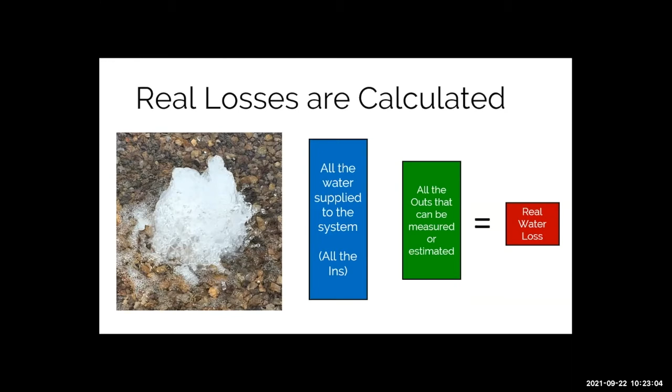Real losses are calculated when using the audit based on all those other volumes that you enter. Since the real losses are calculated, they can't be broken down based on the water balance or the water audit. This is important for you to understand. The real loss value is calculated based on your inputs, so there's no way for the audit software to give you any additional information about that value. So just keep that in mind, that it is a calculated value based on your inputs.

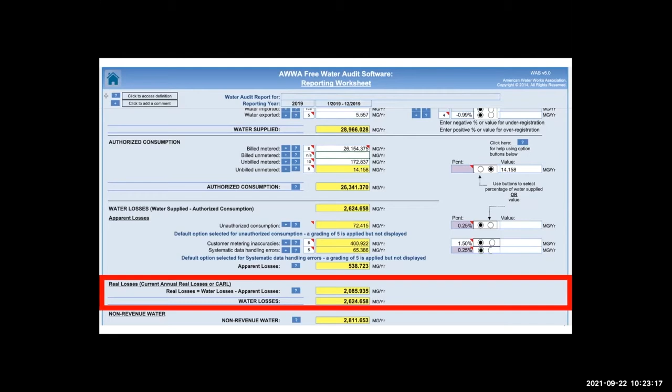And when you're in the audit software, the real losses are calculated at the bottom of the reporting worksheet. So that's where you find them in the audit itself.

So what that's showing us is that real losses are a big concern for some systems - a large majority of their losses are real. And for other systems, a very small portion of their losses are real losses.

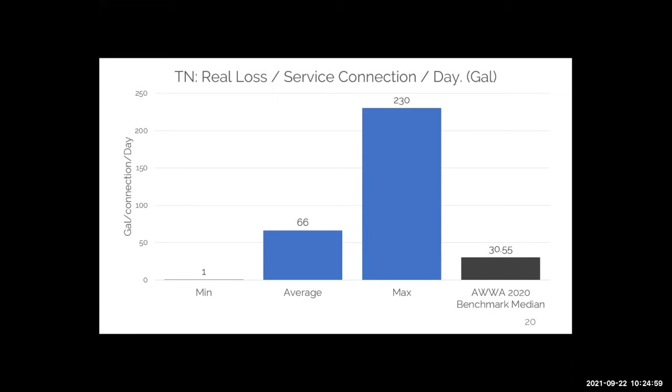And then here is the range of the Tennessee real losses when we look at gallons per connection per day. And again, it's a very large range - we go from just under 1 gallon per connection per day to 230 gallons per connection per day. And the average there is 66 gallons per connection per day, and that average is more than twice the AWWA benchmark median for this key performance indicator. So that means on average our systems are dealing with higher real loss than what the benchmark is, based on AWWA's information. So some work for us to do to reduce real losses in the state.

The customer retail cost is what the customer is actually paying for the water. Some of you have probably worked to refine this number in the audit, looking at things like flow weighted averages for the various customer classes, and taking into consideration the sewer portion of the bill. If you haven't refined that number and you would like to, let us know. We have a couple of tools we can provide to refine this value, and we can walk through those tools with you. The more accurate this number is, the more accurate the values in the water audit are going to be.

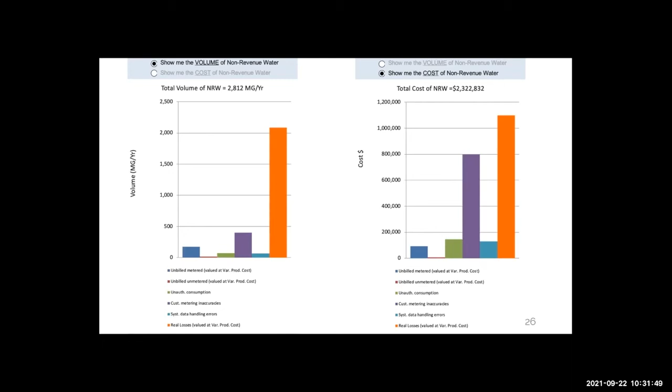And sometimes those bar graphs look similar, and sometimes they don't look anything alike. So it really does depend on how you are charging your customers, if you're a purchase water system, those kinds of things. So just be aware that those tools do exist in the audit, and they can help communicate your water loss story. So let's go back and look at that water balance again.

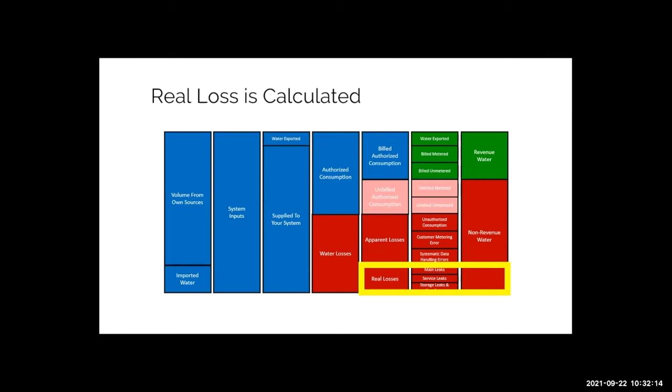The real loss is the outcome of the whole balance, right? It's the calculated part that's based on your inputs for all those other boxes. And since that value is calculated, you don't enter a validity score for real losses, but every other input affects the validity of this number. So let's take a look and see how it does affect this number.

So if any of your inputs is not perfectly accurate... I got some sketches on my screen there. James, I don't know if you have the ability to clear those or not, but if not, we'll address it.

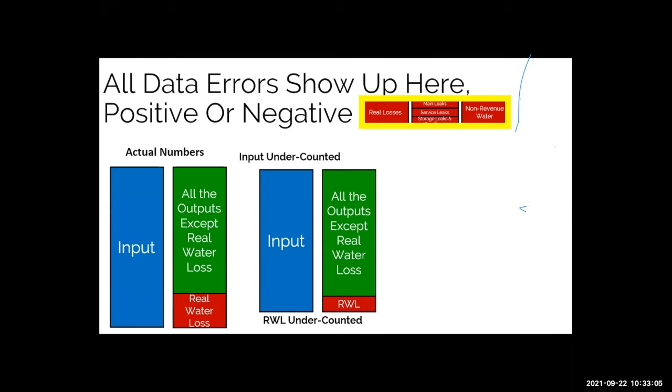But I just saw that I've got some issues there coming up. So if any of your inputs isn't perfectly accurate in your water balance, the errors are going to show up in your real loss number. So if you undercounted your inputs, your volume from own sources, your water imported, then your real losses are going to be undercounted. But on the other hand, if you overcount your inputs, then you're going to overcount your real losses as well.

Then if we look at the other side of things, if your outputs, your authorized consumption, your apparent losses are undercounted, then your real losses are going to be overcounted. Or the other way around, if your outputs are overcounted, your real losses will be undercounted. And hopefully these visuals help you understand what I'm saying here with overcounted, undercounted, and they kind of all blend together. But if you take a look at the images, you kind of get an idea. If we miss something and we undercount, it's going to undercount or overcount. It's going to impact our real loss outputs.

And then, if you have errors in your inputs and your outputs, your real loss will reflect those errors, and it could be going up with one and down with another. So the number that's reported in the audit is really only as valid as the data you entered. This is why you should really look at your data and assess its validity so that you understand what the right next steps are. And again, the Southwest EFC can help to assess your data validity and make recommendations to improve it, so that you're comfortable, you're confident that you don't have too much of either one of these situations occurring within your audit.

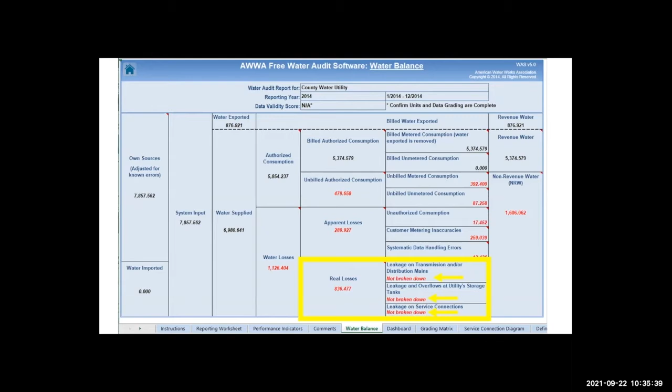And we're going to take a look at the breakdown of real losses and what some of those other tools are that we have today. So I'm going to turn things over to James now and let him walk you through a little bit more on real loss.

James, I don't know if you're talking. If so, you're muted.

Thank you very much, I was. All right, am I showing the right screen here?

Indeed, all righty. So let's talk a little bit about sources of real loss. By that I mean where in your system the losses are happening. Because even though the water balance doesn't break down the volumes, it does lay out those basic categories of locations where losses can occur, and it's worth taking some time to think about them.

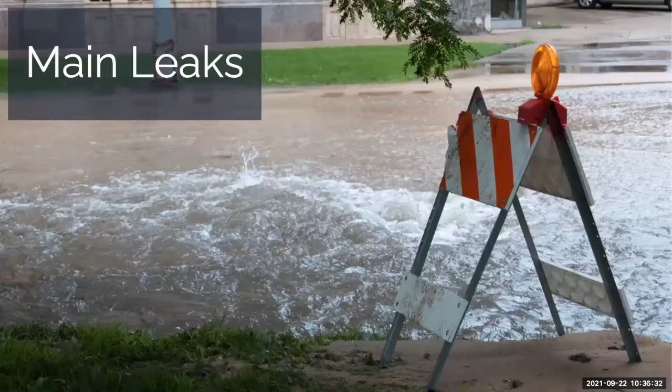First category is obviously breaks on your mains and transmission lines. Some number of main breaks are basically unavoidable over time. Catastrophic main breaks are often the ones that are the most spectacular sources of loss, and often the leaks that have the biggest impact on customers because of the significant effort required for repairs and the fact that you're often dealing with large quantities of water in compressed small amounts of time.

But not everything surfaces. Small main leaks can be particularly difficult to find and deal with, particularly if you're a low density system, or if your sources are very far away, or if soil conditions are just such that they prevent leaks from surfacing.

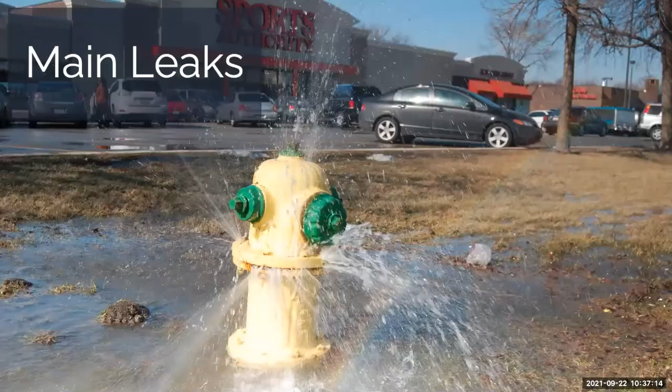Main leaks also include the category of hydrant and valve leaks, even though technically they're on appurtenances, not the mains themselves. For auditing and audit-adjacent analysis, these typically are counted along with main leaks. Some of them are really obvious, like this picture here, if they're near or above ground, but they aren't always. So when you're tracking this information, it's a really good idea to categorize where in your system the leaks are happening, and if it's a leak on a hydrant and not on the main, that's good to know, so you can categorize these different loss sources separately.

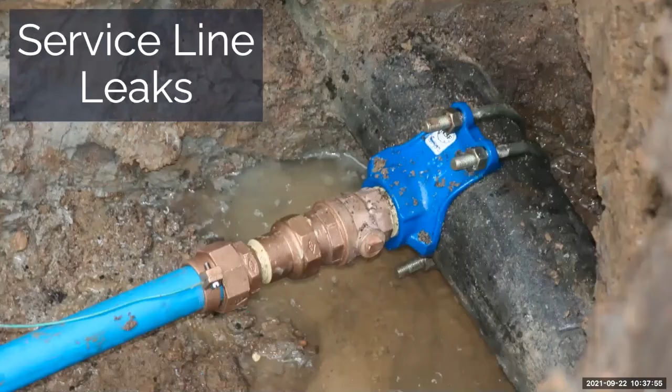Then there's the service line leaks. These are obvious, often less obvious. But it's really important to remember that any leak on your side of the customer meter is going to accrue to the utility, and there may be situations where leaks on the customer side actually accrue to the utility.

Those are, if your system is one that has a leak repair rebate program, which many systems do - I know in Albuquerque we do - if your utility credits customers for leaks on their side of a meter after a repair is made, once that monetary credit is completed, that water is instantly transformed into non-revenue water, and it pushes that credit volume effectively into the loss column. So that's something to consider as well, particularly when you're gathering your information to fill out the audit.

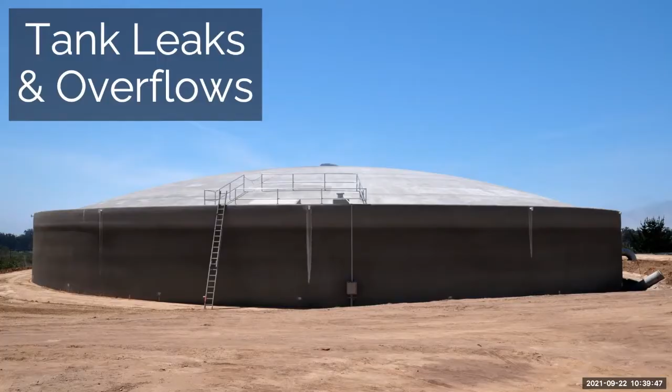There's actually a fourth category of losses, which are losses in the production and treatment process itself, which you have to count if those are inside your audit boundaries. It depends - if you're doing a source to sink audit where you're starting, maybe if you're a ground system at the wellhead and going to the customers, or you could do an audit based on just the distribution system where you're starting at the output of the treatment plant. So whether you have to consider these losses for your audit kind of depends on your audit boundaries, but for the stewardship side of things, it's good to understand what's going on and keep track of these kinds of losses. They're often not talked about because they're typically very small in comparison to the other categories, but they are worth looking at.

I want to be clear that this does not include water that is purposely used during the treatment process or disposed of. If you've got an RO system, the disposed brine is not lost - that's authorized unbilled use. If you've got wells that you flush before pushing water into your system, that's also authorized unbilled use, not real loss. It should be tracked, but separately.

You might have leaks between your sources and your wells, and if you're starting at your sources, you want to consider that. But as Don said, the audit puts everything in one big bucket, and that's a great start because one of the main goals of the audit is to give you information about the magnitude of your losses, magnitude of your non-revenue water.

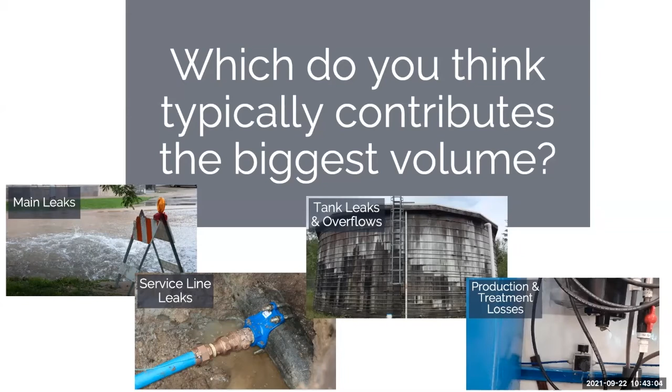Spot on, service line leaks. Typically those service line leaks are the biggest contributor. To quote the AWWA's M36 manual, in well-run systems the greatest annual volume of real losses occurs from long-running small to medium-sized leaks on customer service connections, except when there's very low densities. And oddly enough, these are the leaks that often aren't really tracked that closely in many water systems. I've seen some very big municipal systems that have a big budget and a lot of money and are very sophisticated, and they don't track this information.

So it's kind of a disconnect there - potentially the greatest source of loss being the one you don't actually have much information about. So this is something to think about when you're considering the data that you track and your sources of loss, and what you track now and what you want to track going forward.

So we covered a little bit about sources. Let's switch gears and talk about types of loss, because sort of how the losses are happening is almost as important as where they're happening - possibly more important. In typical systems, you've got three basic types of leaks. My example here is going to be on mains, but there are analogs for service line leaks and tank leaks as well.

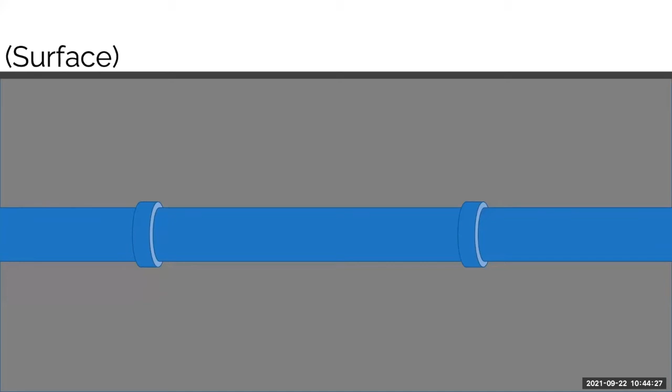A lot of leaks are going to surface, and those are going to be categorized as reported leaks - they're the ones that are found because they show up on their own. The next question to answer is: who found the leak? Was this something your staff found moving around, or is this something that was reported in by the general public? That's another good piece of information to track, because it can give you an idea about how quickly you're finding leaks versus how quickly leaks are being found by other people.

So that's reported leaks. The second category are the unreported leaks, and these are leaks that could be found if you were looking for them - using proactive leak detection, maybe doing acoustic leak detection or night flow analysis or things like that. So these are leaks that are there, big enough to find if you're looking for them, but they're not surfacing on their own.

And so these can potentially run for very long periods of time without being discovered. And last but not least, you've got the sort of background weeps and seeps that happen at joints. And these are typically unfindable and aren't reported, at least not findable using traditional acoustic leak detection equipment, because they're small and continuous, and they just basically don't raise a big enough signal for you to track.

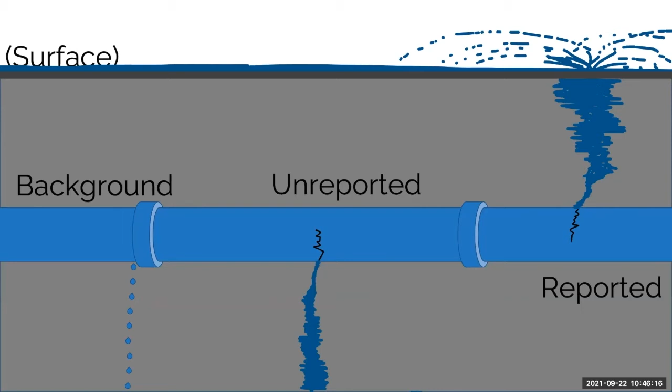Note that I did say traditional equipment. There are a lot of new technologies coming out all the time, and so satellite leak detection and things like that may make these a little more findable as we go forward. The other thing to remember is that there's often a continuum. Things can start out as background or unreported leak, and over time get bigger and bigger and eventually become reported. So even though these are distinct categories, there's a little bit of bleed over time and blurring between the edges.

I think this graph demonstrates that very clearly. A lot of leaks start small and get worse over time. This is an image from a correlator showing the progression of a leak from mid-April to mid-August, and you can clearly see that the acoustic signature is increasing in severity over time. Another thing to note here is that post-repair in late August, the signature is actually lower than it was at the beginning when the correlator was first put on.

So this tells us a couple things. One, we know that the leak was running for at least 4 or 5 months, but in all likelihood it was running for a significant period of time before that. And this is one of those things where we don't have the full story. It could be that this was just a random search and nothing was tipping them off until June, when you had the spike, and then they waited a couple of months to get around to fix it. Or it could be that they actually knew there was a problem ahead of time. But the point is that we've got an idea of how long this leak was going on based on the correlator, but we know it started at some point before that.

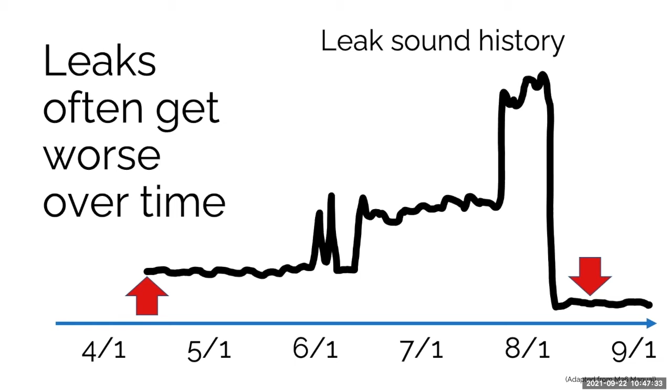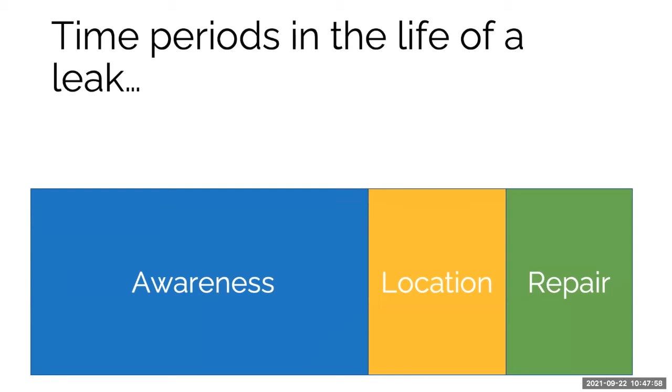So every leak has got essentially 3 time periods during its lifespan. There's the time it takes you to become aware of it, either because it surfaces and somebody reports it, or you went looking for it. That could be short and that could be long. Then there's the time it takes to actually locate the leak once you know it's there. And then there's finally the repair time, the time it takes to isolate it and fix it once it's been found. So when we're thinking about this time frame, it's really all about the runtime. The real loss volume is going to be directly correlated to how long it runs.

And we have to recognize that you can't recover everything. Leaks are going to happen. There's going to be some amount of proactive work that you can do that's going to make it economically recoverable. This might look familiar. There's a similar graph in our apparent loss side of things, and there it's actually more reduction than recovery.

There's going to be some low-hanging fruit that you can deal with economically. There's going to be some amount of loss control that you can do in an uneconomic way, by which I mean you might be spending $1 to save 90 cents. And there may be reasons to do that, in view of a shortfall of supply, or maybe you're pushing up against state requirements. And then there's just some amount that's always going to be unrecoverable or unreducible, and that's okay. We're not talking about zero loss. That's impossible. What we're looking for is an economically acceptable level of loss.

There's really 4 mechanisms that you can use to reduce these losses or keep them economical, or what we like to call areas for action. The first of these is pipeline and asset management, which Don mentioned at the beginning. Real loss control and asset management really go hand in hand. They're kind of 2 sides of the same coin. There's active leakage control.

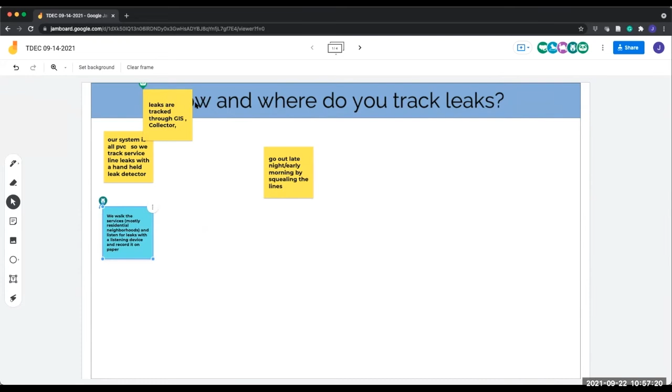GIS collector, walk the services, mostly in residential neighborhoods, listen for leaks. Track everything in Excel spreadsheet with details of pipe material, flow rate, duration, cause. Main breaks are in GPS, in GIS. Yeah, this is great. We'll leave it for another minute or two, see if anybody's like me and does the two-finger typing. Yeah, and these are all great.

And the main takeaway here is, in general, it doesn't matter how you do it. The main issue is that you do it. If you have the ability to do your data collection or your data tracking electronically, that speeds things up considerably. It also helps make the data much more uniform. And if this is something that you're interested in looking into, maybe you're a system where most of this is done on a manual basis.

We spend a lot of time helping systems do system mapping and event mapping. So as part of that technical assistance that Don was telling you about, that the state has provided, if you want to have some discussions about how to go about maybe switching a manual process to an electronic process, or what kind of equipment you could use, we would love to talk to you about that. By we, I mean me and our coworker Luke. We're very into this stuff.

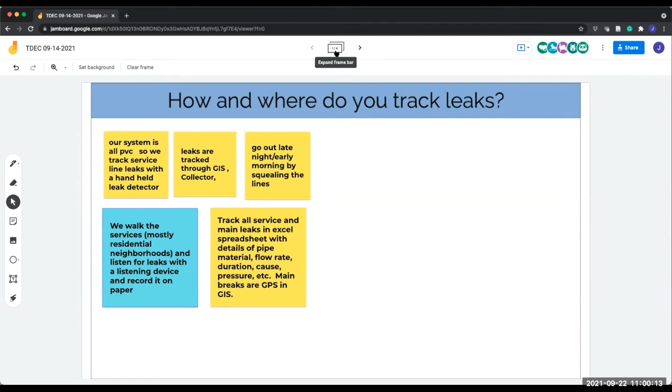Okay, so it looks like we've got all of our responses that we're going to get here on how we track leaks. I'm going to shift gears here. Up here on the top, you can see where it says 1 through 4. You can click over to the next page, and I'm going to transfer one of the answers from our prior slide over here. But here we want to get information on what kind of information you're actually collecting. So one of our responses from the prior screen talked about flow rates and pipe diameters and pipe materials and things like that.

So when you're out in the field, collecting information about a break, whether that's service line or tank overflow or mainline break, what information are you actually collecting? Is it something very basic where you're essentially collecting when it was reported and when it was fixed? Or do you go deeper into the information and collect other attributes that could be useful? So I'll give you guys a few minutes to type that out.

And I don't want to flip back and forth from the screen, but Don, if you wouldn't mind, maybe you could jump to our first screen and grab the attribute data off the one response that was included. Sure thing.

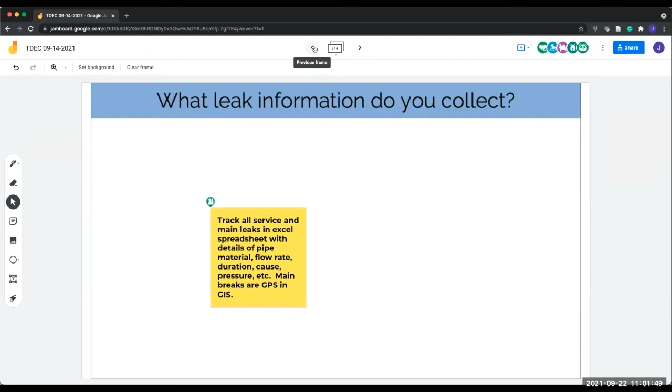So this is, what information are you actually collecting? And oftentimes, this is going to be, oh, here we go. Service line leaks in spreadsheets. So pipe material, flow rates, duration, cause, pressure, etc. Are there other things that your system collects? Do you collect a subset of what's showing there now? Are there other things that you grab?

And remember, if you'd rather use chat than Jamboard, you can do that too. I've got your response, Tim. I'll drop that up here. I was half a second slower than you, James. So you can delete mine.

Yeah, so time reported and fixed, location, supplies used to fix. Yeah, that's important. The supplies used is actually a really important piece, because that goes toward figuring out the cost of any repair. How much employee time did you use? How many clamps and bolts and various other things were used in order to facilitate a repair? Does your system actually know what an average repair costs? And there are quite a few that don't. And are you factoring everything in there?

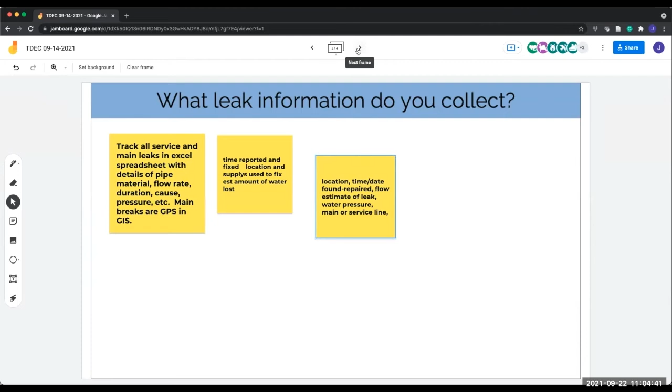Last but not least, we're going to switch over here to page 3. And this is a slightly different question, but how do you decide where to do leak detection? And some of you guys sort of addressed this a little bit in the earlier question, saying that you walk routes and look for leaks. But when you're doing that active leak detection, whether that's bringing in a consultant or doing detection on your own using equipment that you own, how do you decide where to go?

Is it you start at one side of the town and work your way to the other over a period of time so that you can hit most of the system within a period, or are you going to areas where there's problems? Is it random? So think a little bit about and share with us how you decide where to engage in leak detection activities. And these could be any type. We're not really concerned about the type of system or leak detection process you're using. We're just trying to figure out how you decide where to apply it.

Tim, I'll put this in here, or Don, do you want to do that?

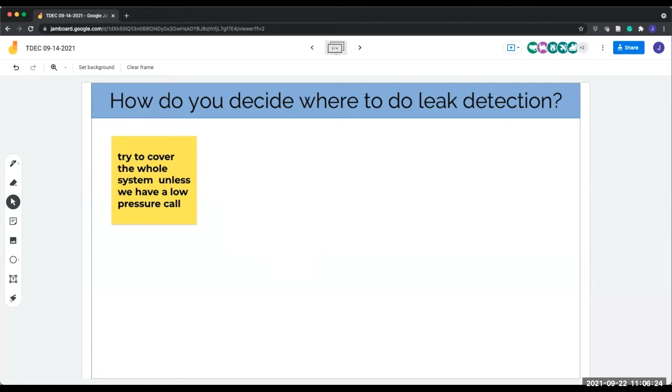Sure. Okay. So Tim added, they try to cover the whole system unless they've got a low pressure call. Yeah, low pressure is an indication that there's a leak somewhere there. So that's something that tips you off. Tim, if you wouldn't mind sharing, what kind of time frame do you try to cover the system in? Obviously, I guess some of that's going to depend on how big your system is. But are you trying to give the entire system a once over, every year, every 2 years?

Known problem areas first, and then age of the services. I'll add that one in, Don.

Great. So Tim says they try to cover the entire system at least once a year, and that's a really good idea, if it's economically feasible for your system, because you basically know that once you've cleared an area, it's clean. So you've got a maximum runtime for any given leak. Let's see, we've got location of historical leaks, age of infrastructure, soil type. Knowing that leaks might not surface in certain places, covering the entire system within a 5-year cycle.

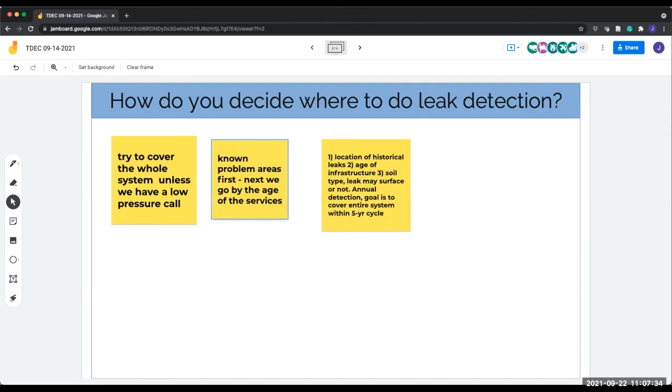And Ricky, I'll add yours in, which is a combination of age of infrastructure, breaking up the system into zones, and leak detecting the whole thing every 1.5 years.

Yeah, so all of these are really good. It sounds like most of you, if not all of you, are collecting and looking at your past leak information to decide where to go. Unfortunately, or maybe fortunately, leaks are never evenly distributed throughout the system. It's quite often the case that leaks tend to cluster in specific areas. And if you're tracking that information, particularly location and frequency, you can really use it to decide where you're going to do your testing.

Because if you're going through the entire system every year, year and a half, and you're finding that certain areas basically just are coming up with no breaks every time, you might shift your processes a little bit and say, hey, the leak prone areas, I'm going to do those twice a year.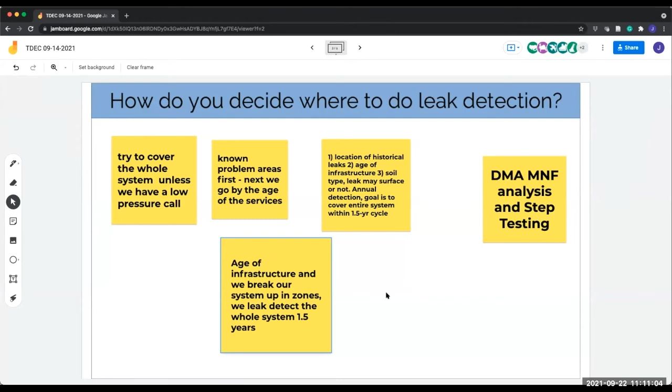And so, even though all this information is good, I would suggest stepping back and looking at your leak detection efforts and the results of them over time, and every couple of years deciding: is the current process and the current time frame we look at appropriate? Do we need to speed it up? Do we need to slow it down? Are there areas we need to cover more, areas we can maybe check less frequently because they're not problematic, so that you can continually and on an ongoing basis refine how you're spending those leak detection dollars and do it the most efficient way possible.

So now we want to focus on the ways that you can control real loss. So what are these tools in your toolbox? James mentioned there were 4 different categories of water loss control activities: asset management, active leakage control, repair speed and quality, and pressure management. There are different tools that you can use under these different categories, which are shown on the screen.

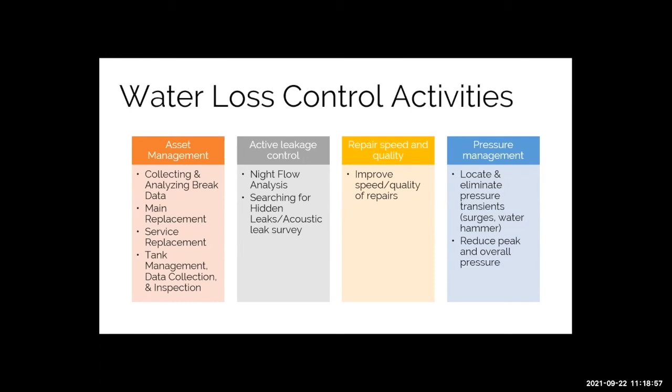Today we're going to highlight some of the tools that you can use to help with water loss control, but we do want to spend just a couple of minutes looking at each category and the types of tools listed. We want you to understand that each of these tools has a different time commitment and a different cost associated with it. So for those that take a larger investment, you need to be very confident that you do have a real loss problem before spending the time and the money to fix it. That goes back to your confidence in your data that goes into your audit.

So let's take a look at a few of these examples. This tool called asset management is one of the best tools that you can use, as it's about your overall system management and water loss control becoming a part of your management plan. In asset management, you're trying to make data-informed decisions to figure out what to do, how to do it, and how to get the most cost-effective, efficient results for your utility. Water loss control can be thought of as a subset of that. So I'm going to show you an example of using asset management techniques to reduce real water loss.

This example also shows that you don't have to just use your water audit as the starting point for water loss control activities that do indeed work and make a difference. So the background here is that this system has been spending about $5 million a year for pipe replacement, and it was having no impact on their break rates or their water loss volumes. So their solution was to really crunch the available data and develop an asset management plan.

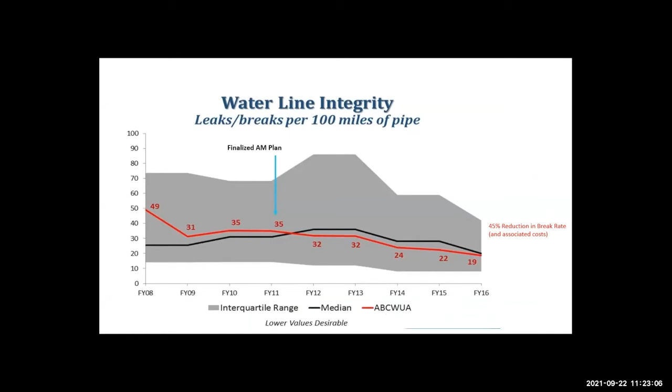This graph is showing the impact of that decision. The asset management plan went into place in 2011, and by 2016, they had reduced their break rate by 45%, without increasing the annual pipe replacement budget at all. They continued to spend the same amount of money, but saw significant gains in their break rates. Not only that, but because they were addressing the most break-prone pipe, there was a 5-year cost avoidance of about $9 million, which they were able to put to use in other areas.

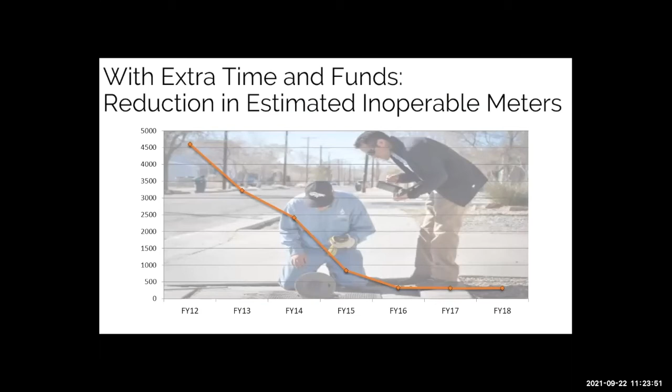So that asset management technique was able to greatly reduce the number of breaks in the system by replacing this problematic pipe, which saved them real water loss, and it also saved them money. With that money, they used it to replace their inoperable meters in the system, going from several thousand inoperable meters to a few hundred. And of course, your meters are your cash registers, so this decreases your apparent losses and brings in additional revenue.

Not only did they do that with the meters, they were also able to start a valve exercising program as part of that savings. So you might say, well, what does a valve exercising program have to do with water loss? Well, first of all, if the valves aren't working properly, it's going to be much more difficult to make your repairs. And you can actually have leakage problems at your valves, so as you're out there exercising the valves, you might be able to discover some of those problems as well.

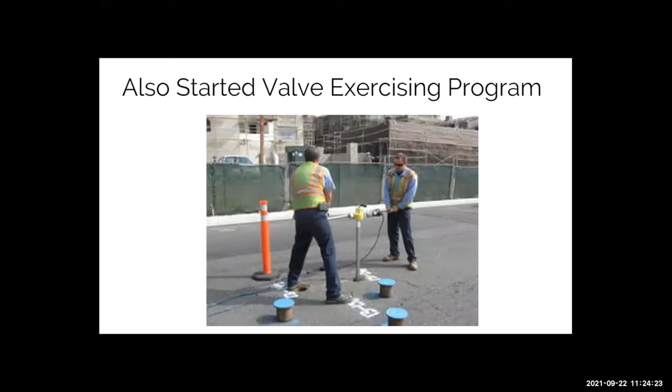The next tool we want to talk about is active leakage control. Here you find hidden leaks by proactively looking for them. So we're going to start with the question, do all leaks surface? And the answer is no. Some leaks never surface, or they don't surface for a very long period of time. We did a study for a 2-year period where there were known leaks in the system and they weren't repaired on purpose. We let them run for 2 years and they never surfaced. There was no visible indication those leaks were there for that 2-year time frame.

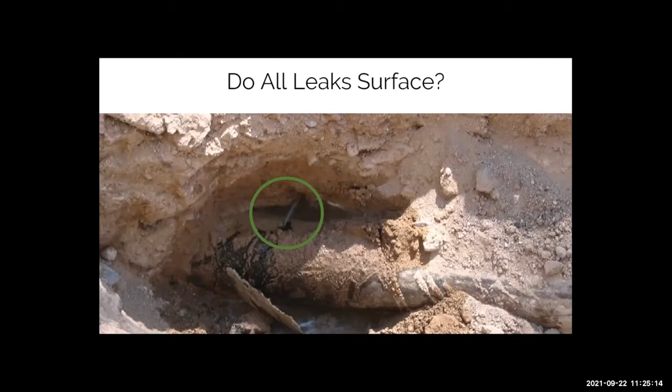So to identify leaks in your system, you have to look for them in other ways sometimes. If you don't, the leak may eventually show up, but it may be a catastrophic failure by that point where you have a major sinkhole or some other issue.

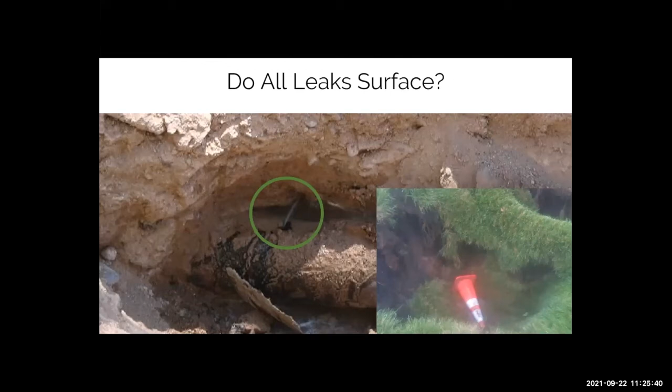When we look for leaks, we can reduce water loss and prevent catastrophic failures. Of course, it's easier to repair with a clamp than replacing a whole section of pipe. It increases the system integrity by keeping the system closed instead of having a hole in the pipe, and it increases the life of the asset. So we want to proactively look for these leaks.

But can we always find the leaks through proactive leak detection? Well, the answer is maybe, maybe not. We don't want to have the mindset that if we go looking for leaks, we're going to find 100% of the leaks in the system, because that's simply not true. We can find leaks, but there's still going to be certain things that for various reasons we're never going to find. It could be based on the skill of the person using the equipment, the equipment we choose to use, the type of pipe, or the soil. There are a wide variety of things, and all of these will determine how many leaks we can actually find.

With acoustic leak detection, we have two basic options for doing a leak detection survey: active and passive. When we do an active survey, we're talking about a person who goes around using specific equipment to listen at various points in the system for a leak. So they're listening through a hydrant or an isolation valve, listening for that noise the leak makes whenever the water's coming out of the pipe.

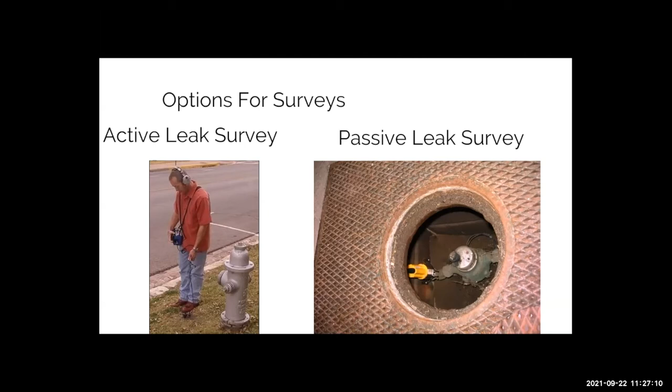There's also passive surveys where you utilize devices placed on valves, hydrants, or meters, and they can be placed either temporarily or more permanently. The passive devices also listen for leak noise. The two examples we have shown here are the ground mics and the correlators.

When you're getting started in acoustic leak detection, you may start with a ground microphone. If you don't have a lot of money to spend and just want some simple tools, it can be pretty effective. It doesn't need as much training as some of the other tools, although you probably do still need some training to know what you're listening for.

You need to know that smaller leaks are louder than larger leaks. You also need to know that some very small leaks you probably won't be able to hear at all. You also need to understand metal pipe transmits sound better than plastic pipe, and a transition in materials can muffle the noise, along with the trench—if the pipe is enclosed in water that's leaked out of the pipe, that muffles the noise too. There are lots of things that can cause you to not hear the leak, or to think you hear something that isn't really the leak.

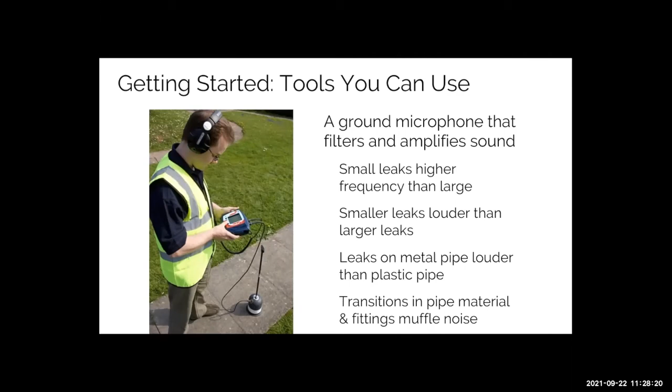Customer usage can sound like a leak, so if a customer is always using water, it can interfere with leak noise. So can traffic noise and electrical noise. You should also think about the time of day and the amount of possible interference you will have when you're doing the leak detecting.

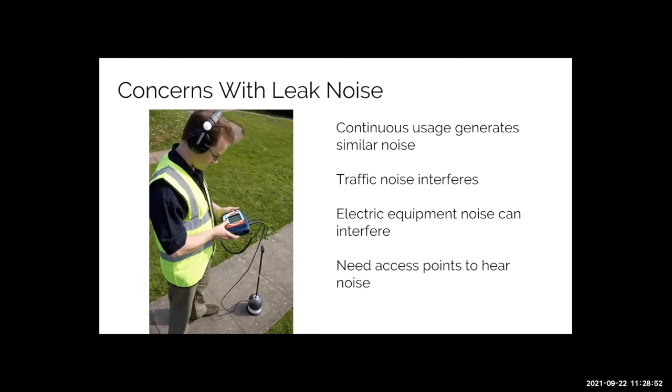You also have to think about where you can access the pipe to listen—at the hydrant, at the valve, at the meter. Are you going to have to do traffic control? Are you going to have to divert traffic? All that kind of stuff, so that you're connected to that pipe.

The system characteristics can actually impact whether you succeed or not: how much pipe you have in the system—is it a lot of pipe or a little bit? How much do you actually have to go around and do? What's the condition of that pipe? What type and size of pipe do you have—what material is it made out of, what size is it—and how many contact points do you have and how far apart are they?

With passive surveys, the device listens for leaks in the middle of the night, and it typically goes like this: at 2 a.m., it turns on and listens. Do I hear a noise? If so, it turns off and listens again at 3 a.m. Do I hear a noise at 3 a.m.? If so, it turns off and listens again at 4 a.m. If I hear a noise at 2, 3, and 4 a.m., it's probably not usage, it's probably a leak. So I'm going to go into leak mode.

If at 2 a.m. I didn't hear anything at all, I would shut down and wait until the next night to listen again. But if I do go into leak mode, then a person with the system can get a device, put it in their car, and drive around to collect the alarm signals, then determine whether the alarm signal is a true leak by doing further investigation.

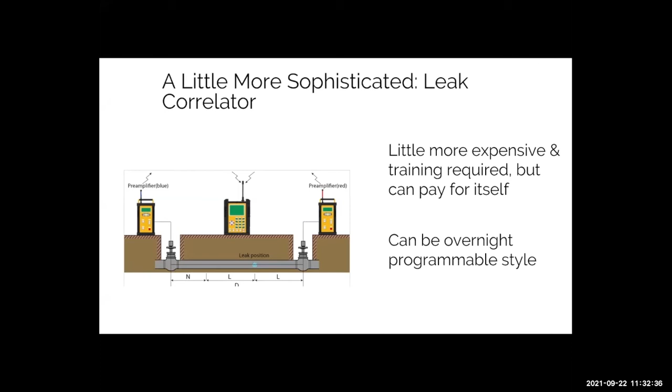Here's a real world example. This particular system is fairly large, and they contract with an outside firm to complete leak detection. This is active leak detection that they do on a quarter of the distribution pipe every year, so the entire system is surveyed every 4 years. When we first started talking with them, they felt like they were doing a really great job leak detecting their entire system every 4 years, as large as they are.

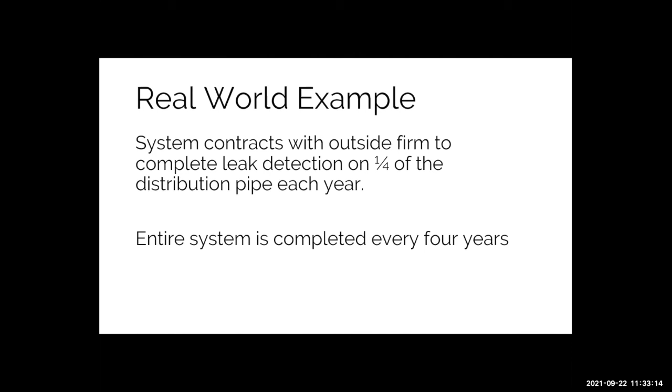But as we talked with them further, we realized there were some pros and cons to doing the entire system every 4 years. They were able to see patterns and trends in the entire system, and the information can be put into GIS to show changes in condition, indicating where the breaks are happening. So that gives us a lot of really good information.

But this particular system can't always prioritize repairing all of the leaks that they find every year. So they're finding leaks, but if they can't fix them, they're not really saving the water. They might want to think about slowing down a bit and doing less of the system every year so that they can get to those leaks and get them repaired. Also, since smaller leaks are louder, they're finding those smaller leaks early on, which is good because they can be repaired before they turn big.

But the small leaks could be masking bigger leaks. And because the survey team only comes out once a year and is only there for a couple of weeks, they don't come back and survey that area after the leak has been repaired.

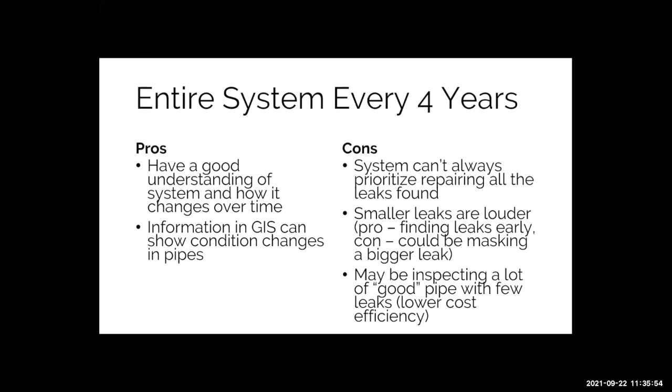So the bottom line here when you're looking for leaks is pace your work to match what you can actually fix, because the improvement in real water loss comes from fixing the breaks, not finding the breaks. You need to match the technology and the techniques to the system's specifics. Use things that will work well on the type of pipe that you have. Choose activities that meet the goals you set. We've talked about goal setting several webinars ago, and you'll really want to make sure you've got goals for why you're doing leak detection, and choose an activity that helps you meet those goals.

Not only do you want to choose the activities that help you meet your real water loss goals, you then want to match your activities to that budget. What can you afford to do? So now I'm going to turn things over to James, and he's going to go through the last two examples of real loss water control.

Uh-oh. There we go, sorry, my screen just did a blip there. Yep, I was going to say, everything went all fuzzy, an odd picture really we've got there, James. Yeah, that was really scary.

So next up is improving the speed and quality of repairs, which is probably one of the more obvious methods of reducing real loss that we have in the toolbox. But there's the question of whether you can and whether you should. And of course, that only matters once you've actually found a leak. The faster you can repair it, obviously, the less water you're going to lose from that point on.

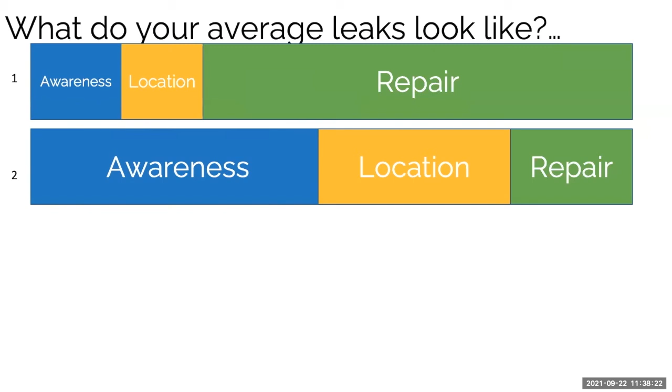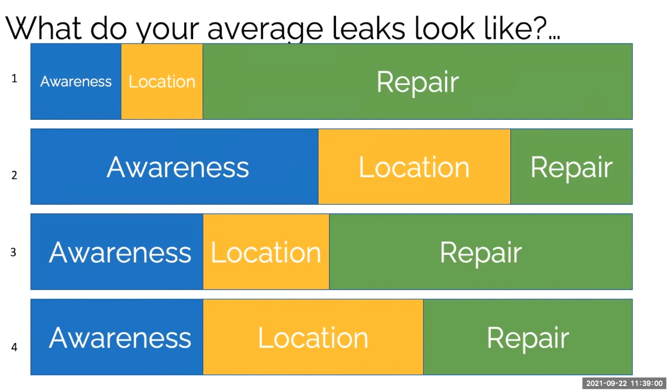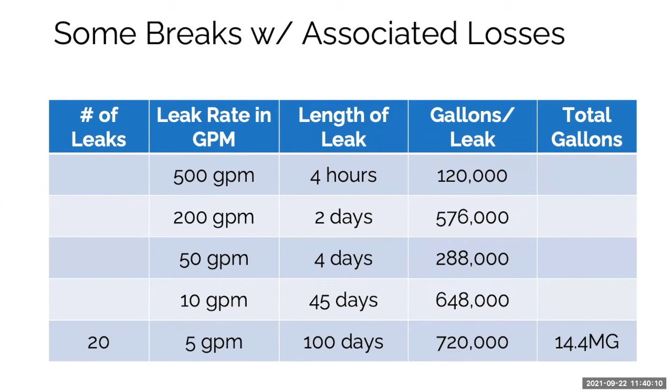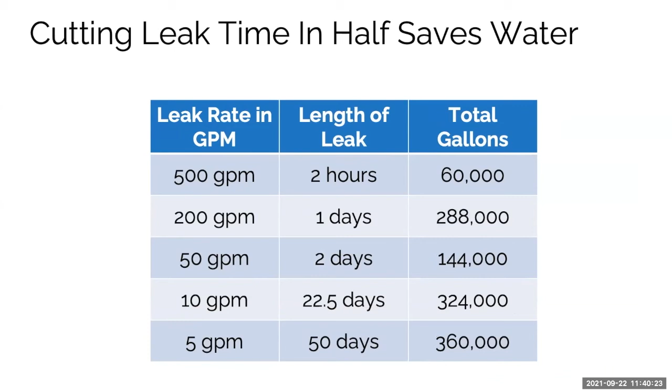But getting back to our initial table, if you can cut the repair time in half, you cut the losses in half, at least the losses from that point where they were discovered. Now, of course, that's gonna save you a bunch of water, but speeding up response time is going to cost money. Nothing is free. So you really need to do a cost benefit analysis and see whether improving your response time actually makes sense for you.

There's the cost of water production that you have to deal with by not speeding it up. There's the cost of additional staff, additional equipment, maybe other additional resources that you need to speed that up. Maybe part of what's slowing you down is not having the spare parts you need around. So you might have to invest in an inventory of spare parts that you can just grab off the shelf and run out and clamp things with.

On the flip side, you've got the benefit of not losing water, not having to potentially deal with those catastrophic losses if you fix things quickly, because sometimes, between the time you find a leak and they get around to repairing it, things are a lot worse. And then there's not just financial benefits too. You really have to think about what we call the triple bottom line on the asset management, those social, economic, and environmental responses or benefits.

So fixing leaks potentially brings goodwill from your customers. Where our director lives in Rio Rancho, people are a little upset with the water utility because there's water running down the street all the time, and it makes them look bad. And people sort of look at that wastage out here in the desert, and it upsets them. So, repairing leaks can build goodwill with the community, or at least reduce the bad will you get when people see ongoing leaks running down the street and nothing apparently being done about them.

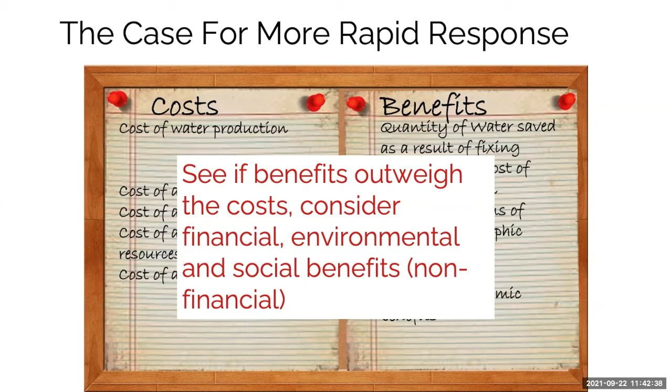So, you really have to determine whether the benefits outweigh the costs, because just because you can do something doesn't mean that you should. Again, we're talking about economic levels of real loss and doing the right thing given all of your different priorities. And to know the impact and figure out those costs, you have to have the information collected about your breaks and your repair times and your response times. And that might not be in an easily accessible format, but usually there are things that can be done to that data to make it more easily accessible. And this, again, is something that we can help you with.

This is an example from a project we worked on a couple of years ago in Gatesville, Texas. They didn't have anything in a GIS map. They had a work order system that had break information in it, and they had some repair logs. And we were able to take that information and basically build them a map that not only showed where the breaks were happening, but also showed how fast they were responding.

So you can see there's 3 different color dots here. The green ones are leaks that were repaired within 24 hours, yellow were repaired within 48, and anything red took more than 48. And so from this basically simple calculation, we were able to come to the conclusion that 34 of these 49 breaks, 70%, were getting repaired within 24 hours. And the slower repairs only accounted for about 18%.

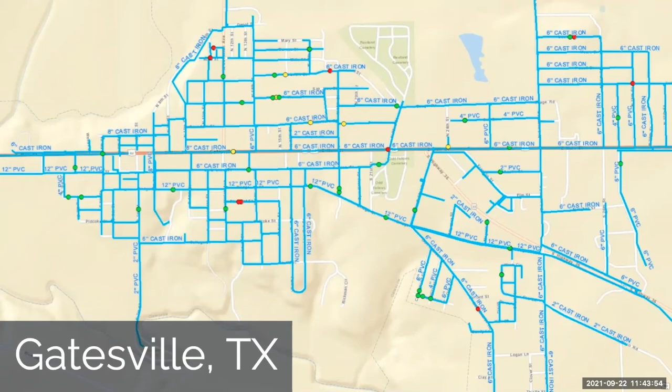From that, we were able to build some cost estimates and see what the impact of speeding up repairs would have. We could use some of this information and other data that they had to calculate flow rates, to look at losses. We could look at the work order system to figure out how much labor they were expending on this, and really do that cost benefit analysis to see whether speeding up repairs was going to be a good solution for their particular problem.

So when you're looking at your break data and how you repair leaks, think about how fast you do that. Do you even know how fast an average repair takes? And once you figure that out, think about whether it can be improved. If so, how, but also consider whether it should be improved. Because again, you can't use all of the tools all the time. You have to be selective. And there may be other things that you can do that'll have a greater impact on your real water loss control.

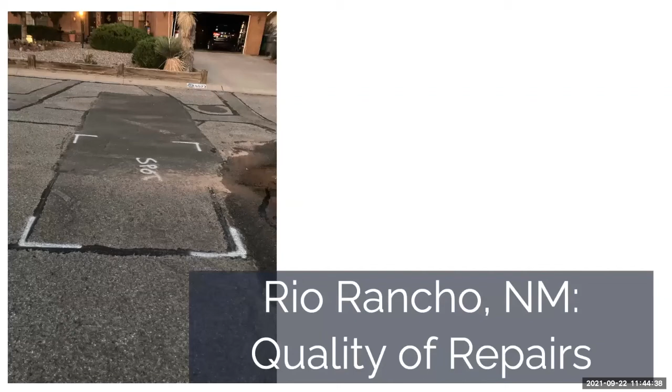Our example here comes from Rio Rancho, as I was telling you, where our director lives. In this particular location, there have been 5 leaks over the last 6 to 9 months, and the utility keeps digging up the street and making repairs. And you can see the spot here is on top of recently repaved street. This is over a service line, and it's leaking again.

And when you look at the surroundings here, we've got the upstream side of this, or the uphill side of this leak, where we've got all this scrub brush, and downstream of it, there's lush vegetation. We're out here in the desert Southwest, so vegetation is a sign that something's going on underground, and the vegetation here lets you know that this is basically an ongoing recurring problem. They're fixing a break, and it's probably breaking within a couple of weeks of the repair.

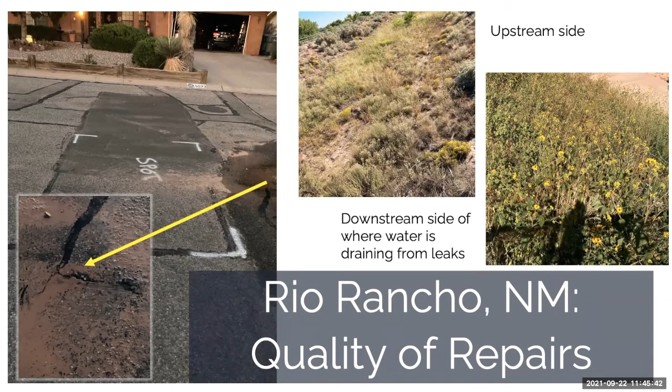So this brings up the question of the quality side of things. Speed is one thing, quality of the repairs is another. If the repairs here were more long lasting, they might not have this issue. As it turns out, they finally made the repair 7 days after that initial set of pictures was taken. So, relatively long runtime for the 5th or 6th time in a 6 to 9 month period.

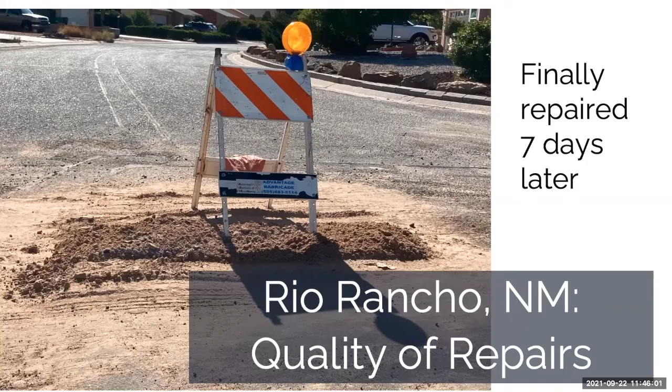So this is one of those things where you have to think about the quality. They keep going back to the same place over and over again. And this is very typical in this system. And what they probably need to be asking themselves is not how fast are we making the repairs, but are the repair techniques that we're using appropriate? Or is it that we're using good techniques, but on failing pipe? And in this particular situation, that's the likely scenario.

It's probably polybutylene pipe. This system has a history of known problems here. And typically, once there's a break on one of these service lines, it continues to break. So in their situation, the solution is probably to sit back and think about what makes sense to do in terms of repairs. If they know anytime an initial repair happens that they're going to be back a couple of times in the next few months, maybe the solution is to just take that pipe out the first time there's a break and not do those ongoing repairs.

And again, if you've got the information, you can do the cost benefit analysis and say, okay, well, it cost me a little bit more up front to actually replace the line, but then I've got the cost savings of not having to come back 3, 4, 5, 6, 7 times in a year. Assuming that you're tracking that information. And you've always got those options to think about in the back of your mind.

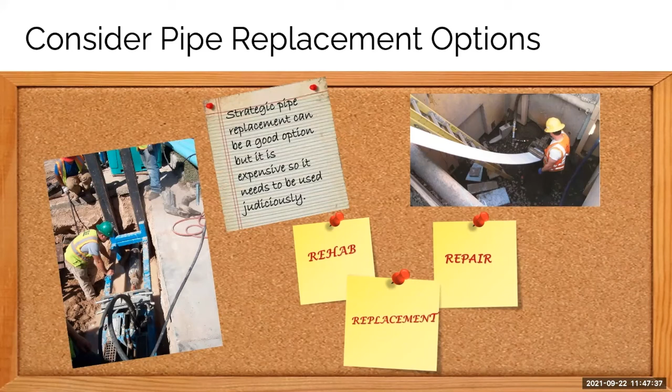You can repair things, you can rehabilitate them, or you can replace them. And you really should keep all of your options open and really look at the big picture of what's going on when you make those decisions, because sometimes the more expensive initial decision is the right one in the long term.

Our last category we're going to talk about here is pressure management. Essentially reducing peak pressure and overall pressure in your system. The system that we're talking about here is one that we worked with on the East Coast. They're in a mountainous area. They've got significant elevation changes, and they purchase water from a regional treatment plant. And this system has to pump water up a bunch of mountain ridges.

And when their system was built, to keep costs down, they tried to minimize the number of pump stations that they need. The flip side of that is that they have to maintain very high pressures so that one pump can push water over multiple ridges. And because of that, the system typically sees pressures exceeding 200 psi throughout the system. And in some locations in the lower elevations, it's actually closer to 300 psi. The system also has over 50% non-revenue water. So one of the issues that they're having is that these high pressures are causing lots of losses.

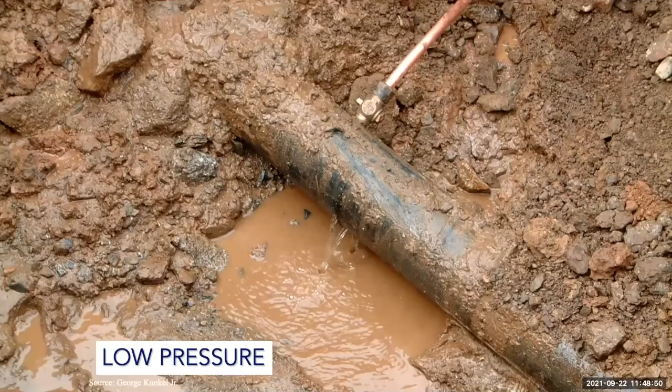So for this particular system, they can reduce their real losses by reducing operating pressure, but they've got to balance that with the costs of pumping that water. So they've got the cost of purchasing water that they're then losing through these leaks. But if they're going to address this, that means adding new booster pump stations and maintaining them over time, which also is a cost. So like everything else, cost benefit analysis is kind of required here.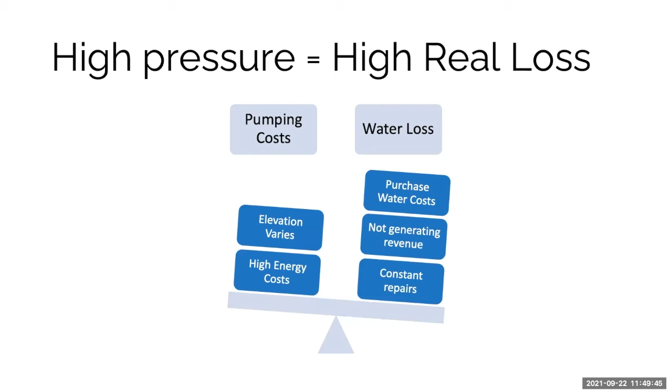And they need to see whether reducing pressure is a useful solution or a workable solution for them, and decide which route to take. Because when they have failures, they tend to be catastrophic because of the very high pressures that they're working on. So high pressure obviously is going to lead to more breaks and more water loss in all 3 categories that I talked about. The background leakage is going to be higher. Those unreported leaks are going to be higher, and the leakage from reported breaks is going to be higher.

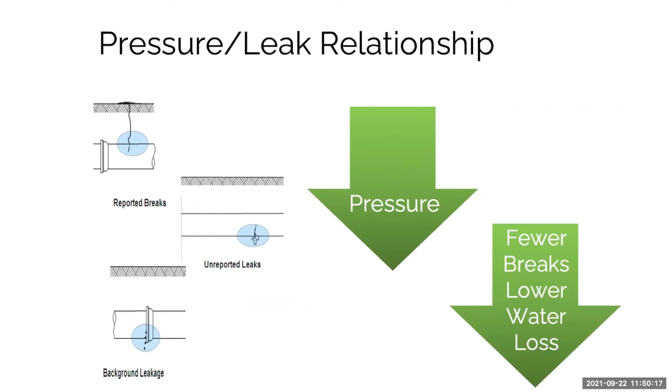If you can lower your pressure, it will have a net positive effect. The water loss will go down even with the same number of breaks, and there's a very good likelihood that you will have fewer breaks. If you're interested in trying to figure out, well, if I lower my system pressure on average 5 psi, or maybe do that in a certain part of the system, what is that going to benefit me?

One of the KPIs in the water audit, one of the more esoteric ones, is actually a loss per connection per pound of average system pressure. This is in the audit, and it's a calculation that you can do. And this example here shows you approximately the net impact of a 10-pound reduction in pressure from 65 to 55. It's a little over 3.5 gallons per connection per day that would potentially be saved.

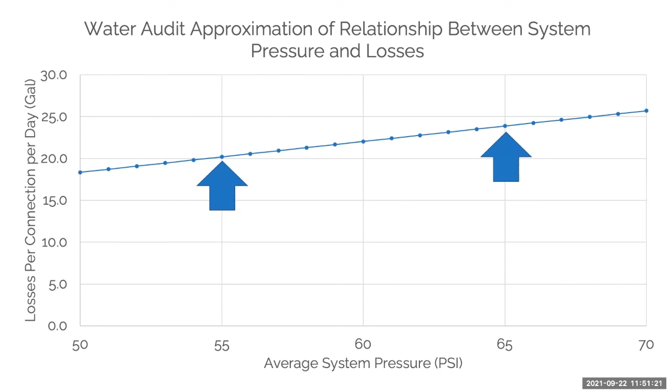This is not perfect. It treats this as a linear equation when it's not in real life, but for planning purposes, it's really useful. So if you're looking at what a pressure reduction might do for you in terms of reduction in real water loss, the audit actually has a piece built in that you can use for that.

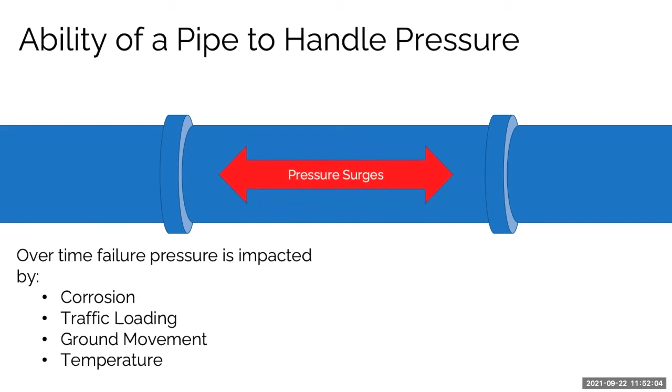The other thing you have to think about with pressure, and particularly pressure transients, is your system was built to handle a certain range of pressures. Let's say we've got a newly installed main and the failure pressure is somewhere around 150 to 200 psi. You're going to have pressure transients and surges, or even higher than normal pressures periodically. And when it's new, the pipe's going to handle that. But over time, that pipe's going to be impacted by things like corrosion and traffic loading and ground movement and temperature swings. And as you continue to have pressure surges, your system is going to be less capable of handling those. At some point, the failure pressure might drop down to 70 or 100 psi.

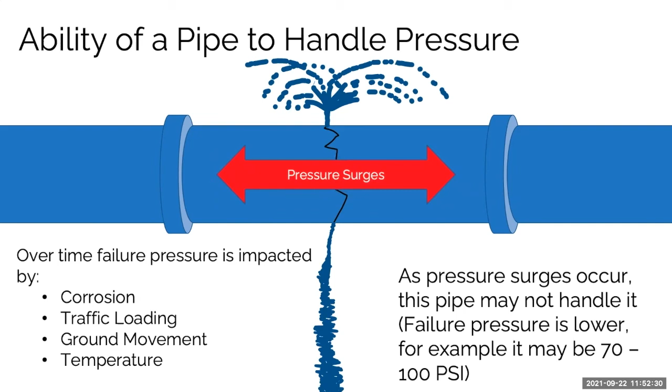So this is another good reason to collect data and have a hydraulic model of your system so that you can track pressure in the areas where breaks are happening, because that is really useful information. You can use that information to track those transients and try and reduce them, and decide how you're going to do your pressure optimization.

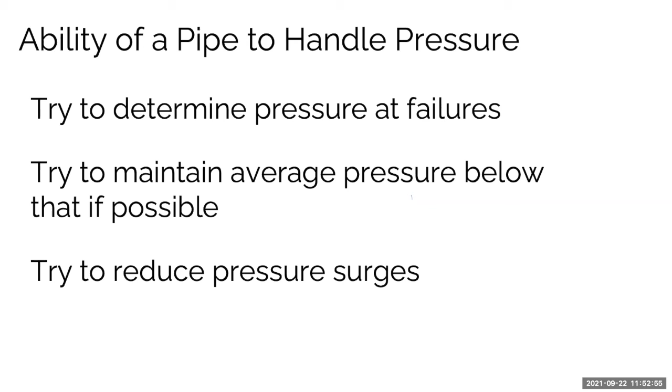So if you know what the pressures are in areas where things are consistently breaking, you can use that information to see whether it's possible to maintain average system pressures that are lower than that, and use that information to try and reduce pressure surges. Because if your system has pressure issues and you don't address them, your break rates are guaranteed to increase over time.

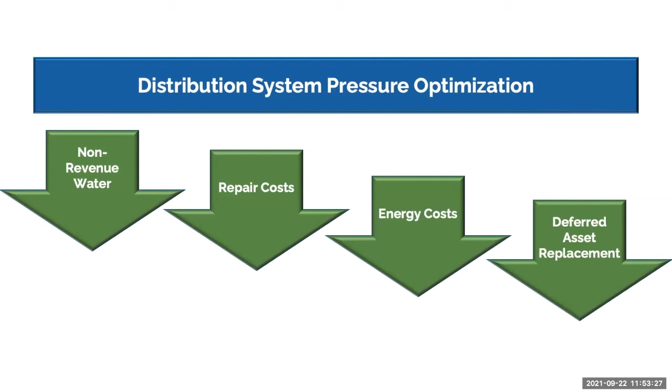And even if you don't have a problem with breaks due to pressure transients and things like that, think about pressure optimization. If you can lower pressure in some or all of your system, it is definitely going to impact your non-revenue water. It's going to lower your repair costs. It will probably lower your energy costs as well, and can have positive impacts by allowing you to defer asset replacement. So think about, are you optimizing system pressure? Is this something that's even on the radar?

If it's not, can you reduce it? Because even a small reduction may help you over time.

So we've got about 7 minutes left. I'm going to do a quick run through on some internal metrics. In our Jamboard exercise, we saw that you guys were collecting lots of information about events, and that's really good. We're going to talk briefly about what do you measure, what could you measure, and what should you measure. This takes us full circle back to the beginning where we talked about goals. I want to point out that despite the state using percentage metrics for their minimum audit requirements, your internal metrics shouldn't just be those. Those percentage metrics are actually better avoided because they don't really give you an accurate picture of what's going on year over year.

If you focus on non-revenue water as a percentage of supply, for example, and nothing in your system changes year over year, but your customers start conservation and use less water, your consumption is going to go down, but the end result is that your non-revenue water is going to go up because it's going to be a bigger piece of that big puzzle. So it's better to focus on metrics like real loss per connection, because those metrics aren't going to be impacted as much by conservation efforts or changes in system size, for example.

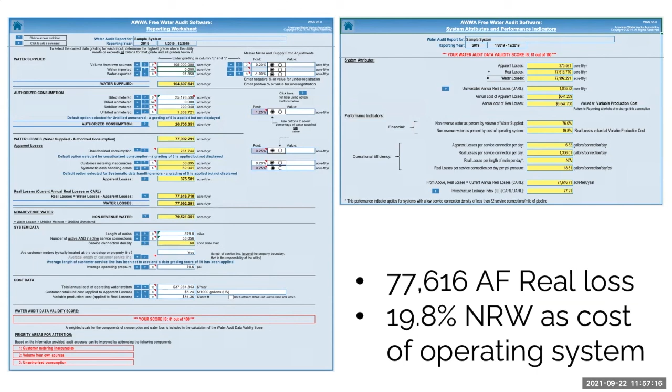You could actually push the loss up to almost 78,000 acre feet and still come in under that target. Now, obviously, I stacked the deck a little bit here—I just increased the system input, and you would expect costs to go up a little bit as well with that. But the point I'm trying to make here is that you can do really bad on the real loss side of the equation and still meet that 20% NRW as a cost of operating your system. Just meeting those requirements is not going to drive water loss control at anything more than a very basic level.

You've really got to identify those problems and take action. The comptroller and the boards aren't really there to tell you how to decrease that non-revenue water or how to decrease your losses. They provide you some guidance if you fail to meet the requirements, but what TDEC wants you to do is really understand your water loss and better control it. That's what this program is really about and why it exists. The need for water loss control is clear, and what we're trying to do here is provide you some of that how-to and assistance with what to do about it once you find it.

So don't just focus on your real loss goals. Also think about them in the context of your loss control program and related goals, and try to be comprehensive about it. The audit is step one, but you really have to go further than that. And most of you seem to already be doing that. Track that event data. Think about the questions you want to ask and whether the data that you collect helps you answer them.

It's really going to help you see those patterns, identify the losses, so that you can make the appropriate adjustments and apply the appropriate tools.

The currently favored metrics for version 6 of the water audit are not those percentage metrics. Those have really been phased out. So for your internal view, I recommend highly that you switch to this kind of metric if you haven't. They're looking at unit real losses in terms of gallons per connection per day, or for less dense systems, gallons per mile per day, both for real and apparent losses, and then a combined number for total losses. And then also looking at the cost rate for those: what is the dollars per connection per year for real losses, apparent losses, and total unit losses.

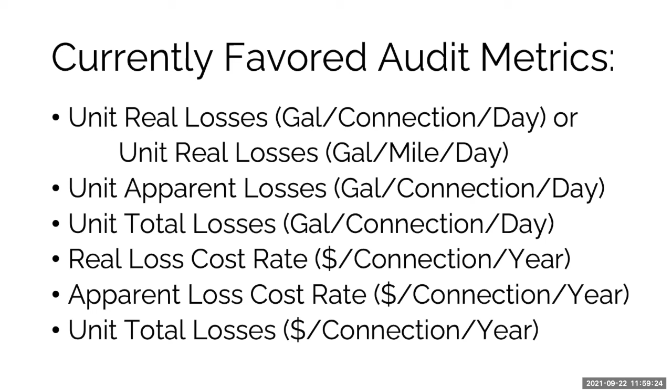You really want to be able to look at all of those to decide which is more important to tackle first. As Don pointed out, sometimes there is a disparity between the volumes and the values, and you want to make sure that you're attacking the right thing the right way.

Obviously, there are a lot of other internal metrics that you can keep. Those are going to be situation specific, and you should really think about your needs, whether you keep information about events and locations and duration so that you can track response times. If theft is an issue, you might want to keep metrics on instances of identified theft, identify the lost and recaptured lost revenue. Those avoided costs—it's important to know what those are.

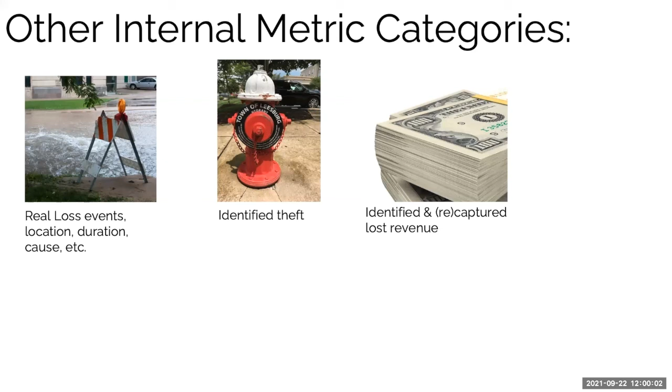Think about your supply conservation. You may want to keep metrics on that—repair time, impacts, repair costs, all good information, all good useful internal metrics, which will help you with not only real loss control, but asset management if you go down that road, and we highly recommend you do. There are obviously many others that are going to be situation specific.

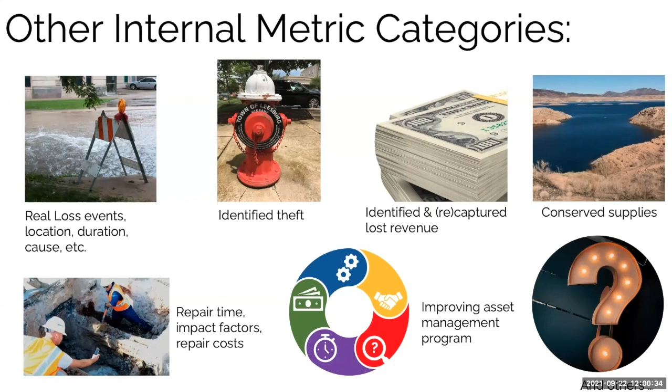The goal here is to get goals that fit your system and collect information and apply tools that fit your particular situation. The toolbox is a great place to start. We've gone over a couple of the options there. There are many more tools available. If you haven't visited our website yet, I highly recommend it.

It's swefc.unm.edu. We have recently unveiled a water loss control switchboard there. I think we have 54 different tools up there right now and resources, manuals from a variety of different states, lots of different tools that you can use to both categorize and address your real losses.

One of which, if you've got a lot of break data, is this break rate index tool that we have, which you can use if you've got information about the frequency of breaks and the materials those breaks are happening on. You can input that data and see how your system breaks compare to national averages on a material-wide basis. AWWA uses that 0.2 breaks per mile per year as kind of a catch-all, but everybody's system has a different pipe makeup, and that has a big impact on your break rates and what they should be.

This is an example here. This shows basically the index. It does a weighted average calculation based on those average break rates that are out there from a couple of Utah studies of about 15% of the pipe in the country, and it gives you a score for the system as a whole down here.

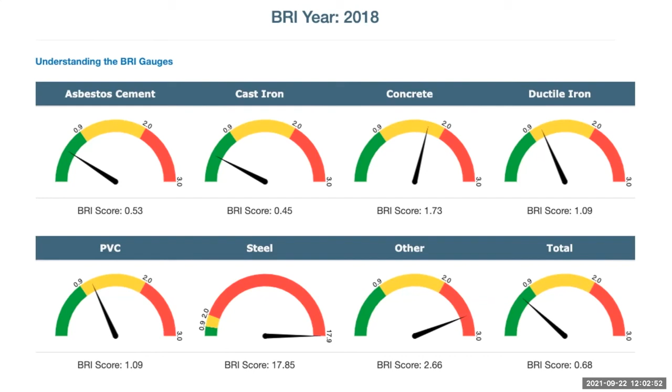If your score is 1, that basically means your system is breaking at the national average. If it's less than 1, in this case 0.68, it's breaking at about two-thirds of the national average. If it's higher than 1, it's breaking at 2-3 times that rate. In this particular example, most of the pipe is doing really well, but their steel is breaking at almost 18 times the national average for steel breaks. So this is one of those tools that you can use completely separate from a water audit to hone in on which materials in your system are causing you problems, to help you start taking some specific action and help to target your action.

There's also the real loss component analysis. This is another tool that is designed to help you categorize your losses based on break information that you collect, so that you can take that water audit magnitude, big picture, and start breaking things down. This is a relatively complicated tool to use, but we have a lot of experience with it.

If this is something you're interested in looking at, please reach out to us. It hasn't been updated for a while, so it's running on an older version of Excel, and not all of the features work with the modern versions, but we've got some computers with old versions of Excel, so we can help with that.

So that pretty much wraps up our presentation for today. We hope it's been useful. We've got an applied activity here that for this case is a survey, I believe. And I'll turn this over to Don, and then we'll open up the floor to any questions you may have.